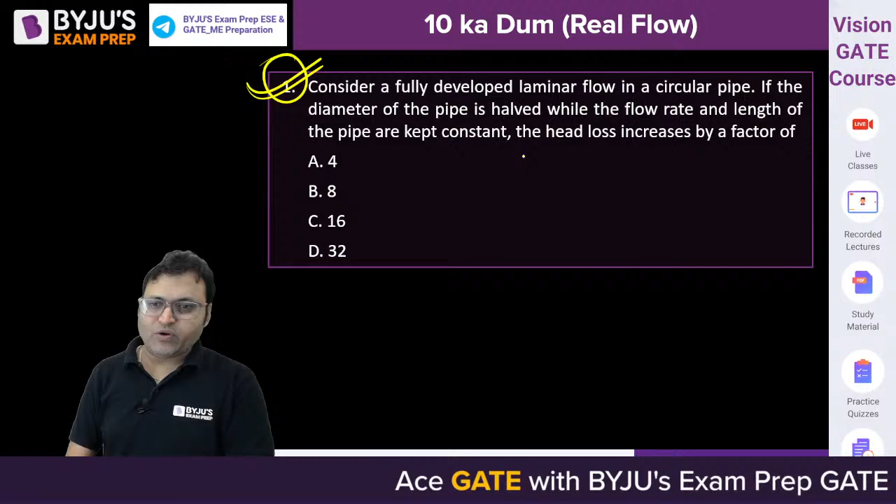Yes, do let me know the answer. Consider a fully developed laminar flow in a circular pipe, which is internal flow. When do we have laminar flow in a circular pipe? When the Reynolds number is less than 2000, it means the flow is laminar. If the diameter of the pipe is halved, it means D2 becomes D1 by 2, and the flow rate and length of the pipe remain constant—flow rate means discharge and L remain constant—the head loss will increase by a factor of, yes, waiting for your answer.

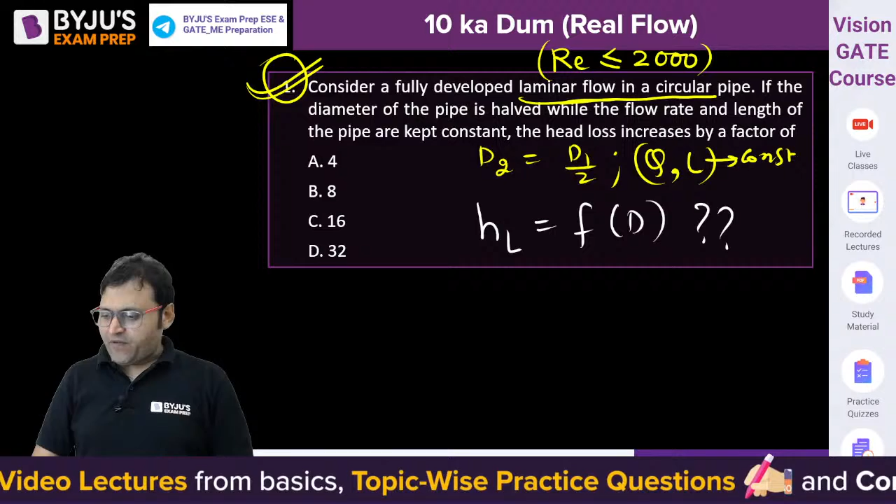From the question, it is clear that we need to develop a relation between head loss, which is due to friction, and diameter. The objective is to develop a relation between head loss and diameter, keeping the discharge and length of the pipe constant. Can you do it? Those who are here, find out the answer, develop the relationship. Once your relationship is correct, this is how the questions are framed. Nobody is going to ask you a formula-based question in the GATE examination. All questions will be conceptual, relation-based, and will require an in-depth understanding of the concept.

So we can use the Darcy-Weisbach equation, because the Darcy-Weisbach equation is the equation utilized to develop the expression for head loss due to friction. According to the Darcy-Weisbach equation, HL is given by FLQ square upon 12.1 d to the power 5.

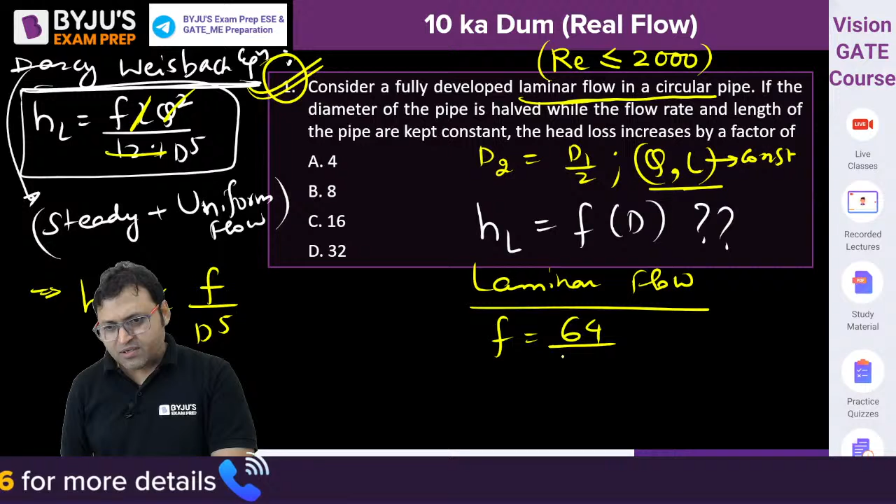And for laminar flow in the pipe, F is given by 64 by Reynolds number. What is Reynolds number? 64 mu upon rho into V into D. 64 is constant, viscosity is constant, density of the fluid is constant.

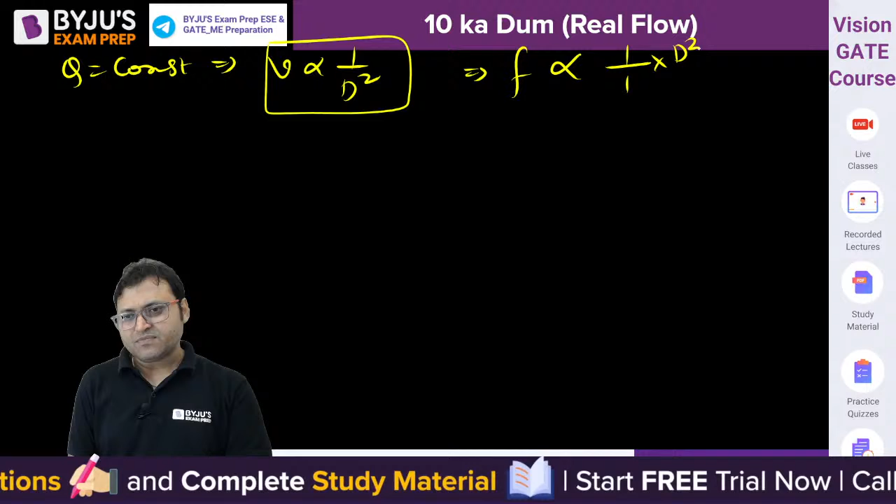So it is inversely proportional to V into D. And if Q is constant, what is Q? Pi by 4 d square into velocity. If Q is constant, then V is inversely proportional to d square. So F is proportional to 1 by V, that is 1 by d square upon d. So friction factor is directly proportional to diameter.

And if the friction factor is directly proportional to diameter, put this in equation number 1. Put the value of friction factor. So HL will be proportional to D upon D to the power 5.

So HL is inversely proportional to D to the power 4. That is the expression, that is one method. If you are able to develop the right expression, you will get the correct answer.

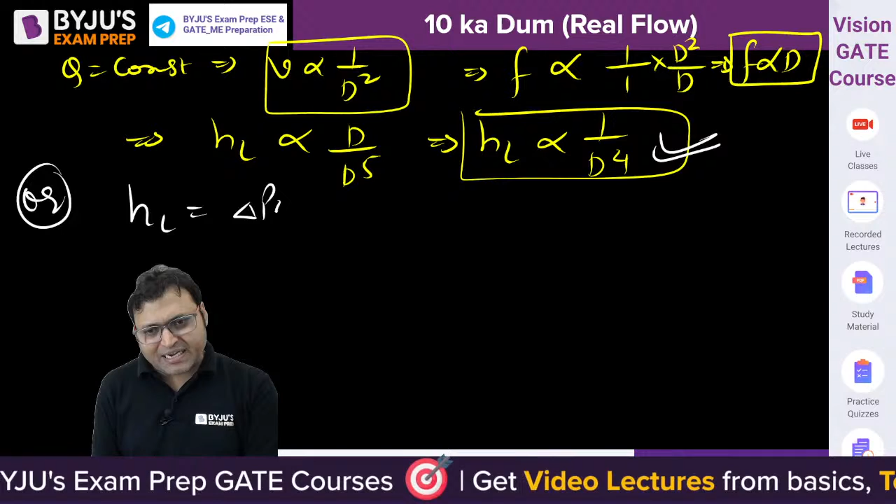Or what you could have used is HL equals delta PL by rho G. And for laminar flow, delta PL can be written using the Hagen-Poiseuille equation as 32 mu VL by D square. That is called the Hagen-Poiseuille equation, which can only be used for laminar flow through a pipe.

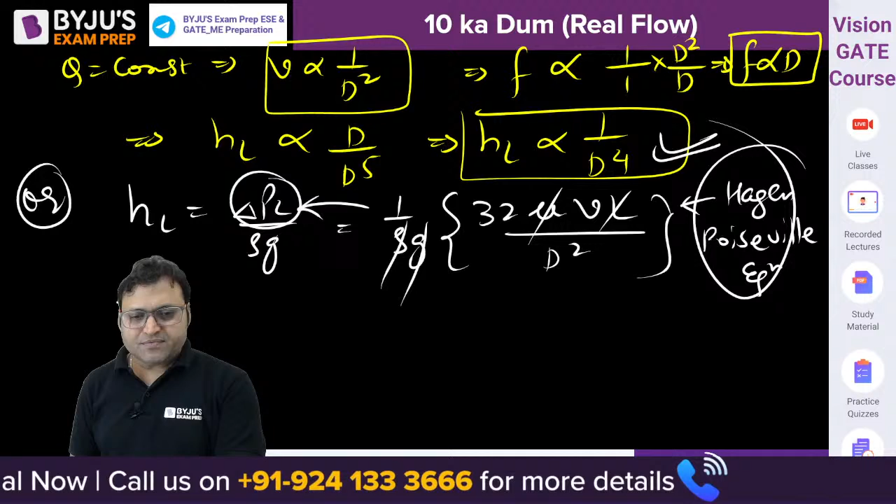So rho is constant, G is constant, mu is constant, L is given constant. So we could say HL is proportional to V upon D square, since 32 is constant. And V is equal to 4Q by pi D square. Because Q is constant, V is inversely proportional to D square.

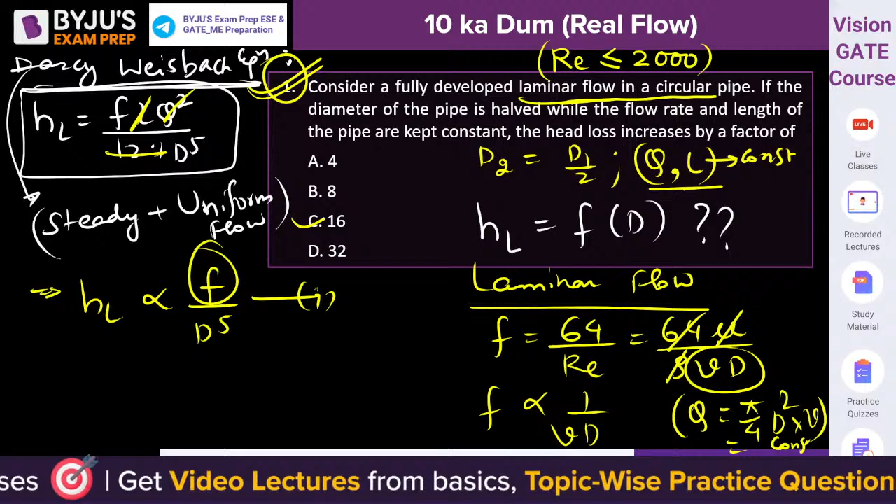If we put this in here, we get HL is inversely proportional to D to the power 4. So the correct answer will be 16. Option C is the right answer for question number 1, 16.

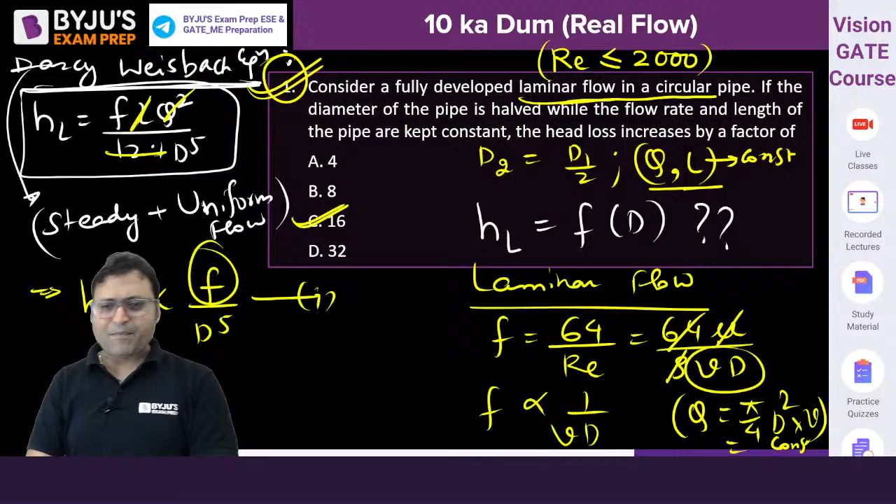Anybody having any doubt, just let me know. Either use the Hagen-Poiseuille equation or the Darcy-Weisbach equation, that is purely your choice. But if using the Darcy-Weisbach equation, you need to take care of the friction factor, which for laminar flow is 64 by Reynolds number. If using the Hagen-Poiseuille equation, it will be more simple to develop, and the relation will become the same.

Next question from dimensional and model analysis. Please give it a try. Question number 2.

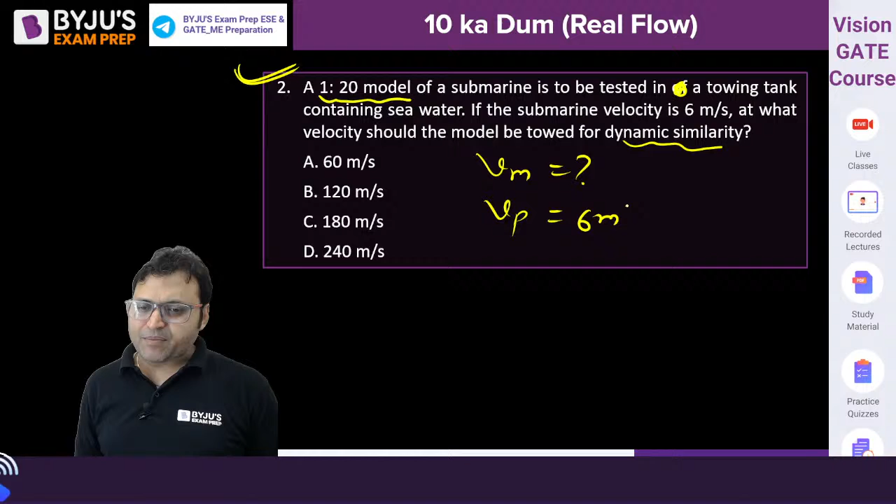Question says: a 1:20 model of a submarine is to be tested in a towing tank containing seawater. If the submarine velocity is 6 meters per second, at what velocity should the model be towed for dynamic similarity? So we need to find the velocity of the model. Velocity of the prototype is given as 6 meters per second, and LP by LM is given as 20 by 1, or LM by LP is given as 1 by 20.

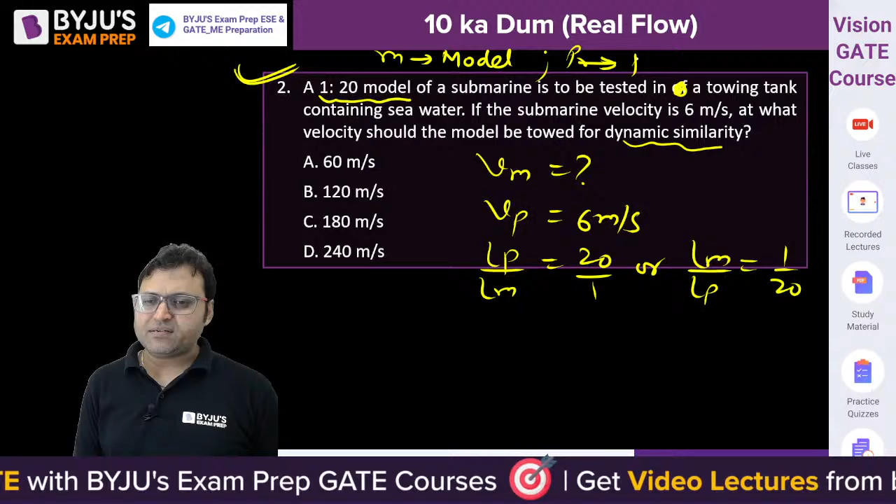Model is a small scale replica and prototype is the actual part. We use the suffix M for model and P for prototype. Now, because it is a submarine, a completely submerged body, viscous force and drag force are important. As viscous force is important in the analysis, we need to use the Reynolds model law.

We must use Reynolds model law. According to Reynolds model law, the Reynolds number of the model must be equal to the Reynolds number of the prototype. And what is the value of Reynolds number?

That remains constant. So Reynolds number, rho V L by mu, is constant. Rho is constant, mu is constant, so V into L, or V is inversely proportional to L. That is the relationship, because density and viscosity will be taken constant. The fluid is same.

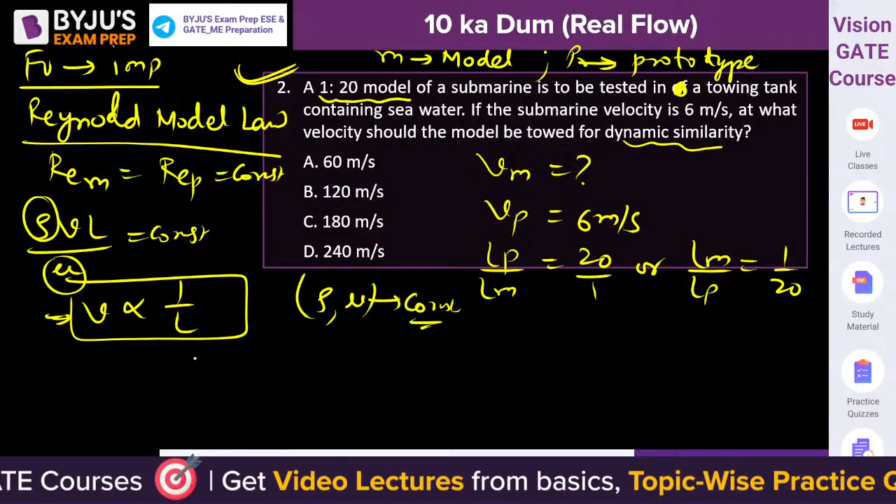So Vm by Vp is equal to Lp by Lm. What is Vm? Velocity in the model, prototype is 6 into Lp by Lm which is 20, giving 120 meter per second. So B will be the correct answer. The answer to this question is B.

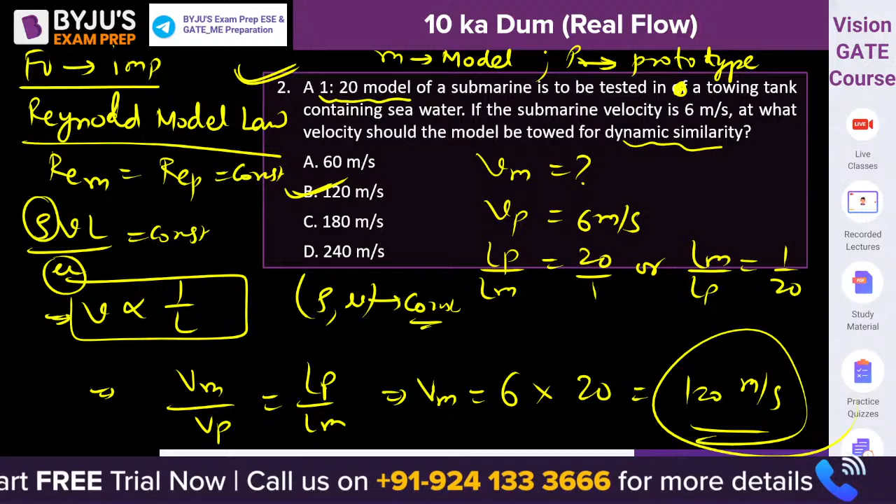Now let me see who will get me the correct answer for the next one.

Question number 3, on your screen. Can you give it a try? The question is from drag and lift, from the concept of drag and lift.

The question says an oil droplet, density of oil is 800, is rising in still water at a constant velocity of 1 millimeter per second. So the velocity, let me call it capital U, is equal to 1 mm per second. Its radius is approximately what we need to find.

It is the concept of terminal velocity, isn't it? The terminal velocity is the maximum constant velocity, or the constant velocity with which a body will be traveling in the fluid. So U is the terminal velocity.

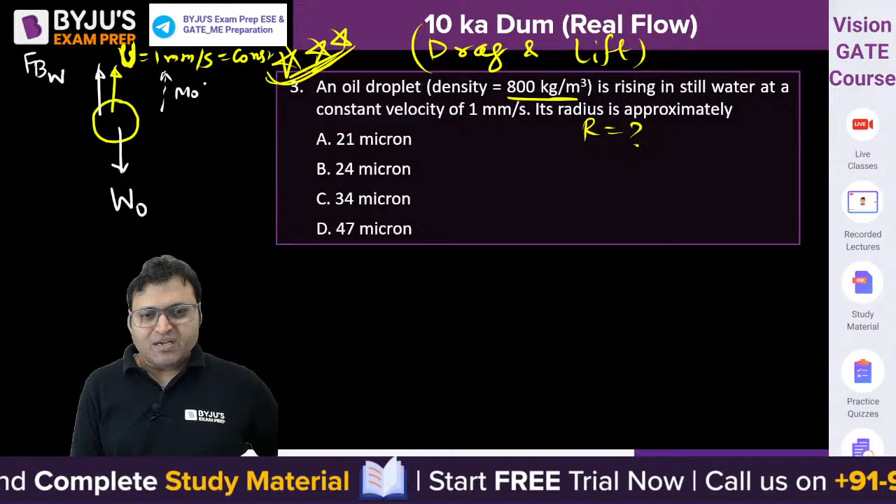What are the various forces acting on this? There is weight of the oil acting in downward direction. Then there is an upward force acting, that is buoyant force due to the immersed body. The droplet is completely immersed in water, so buoyant force by water will act in upward direction. Also, because it is moving upward, drag force will act in downward direction, opposing the motion.

So for vertical equilibrium, buoyant force by water must be equal to drag force plus weight of the oil. Sigma F is equal to 0, that is why velocity will be constant, and drag force Fd is a function of velocity.

So we can say Fb minus W, buoyant force by water minus weight, is equal to drag force. What is buoyant force by water? Density of water into G into volume of the droplet, minus density of oil into G into volume of the droplet, is equal to drag force.

Drag force can be written using Stokes law. So the drag force is 3 pi mu into velocity and diameter, using Stokes law.

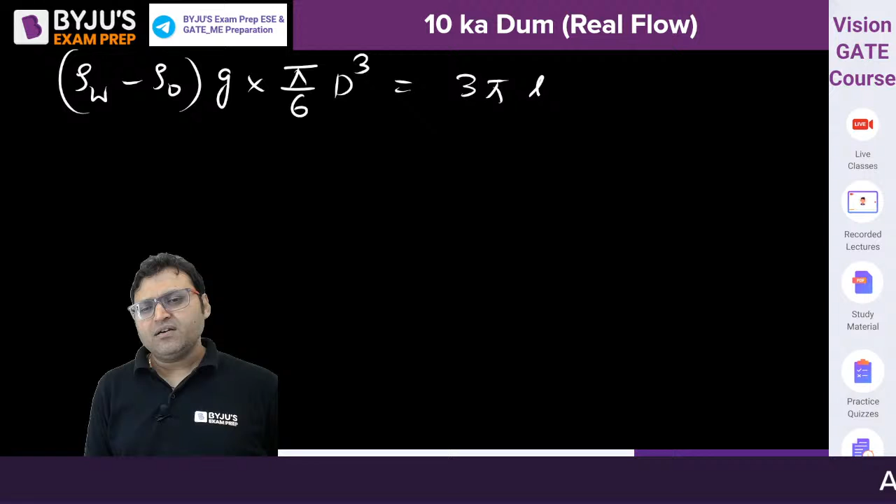So 3 pi mu of water into U into diameter. We can say rho of water minus rho of oil into G into volume of the sphere, which is pi by 6 into D cube, is equal to 3 pi mu of water into U into D. From here we can find out.

This one D will get cancelled out, it will become D square. So D square is equal to 18 pi mu of water into U. This pi and pi will also get cancelled out.

So the expression becomes 18 mu of water into U upon rho of water minus rho of oil into G, then under root. If we want D, it will be under root of this. And once we get diameter, we can find out the radius.

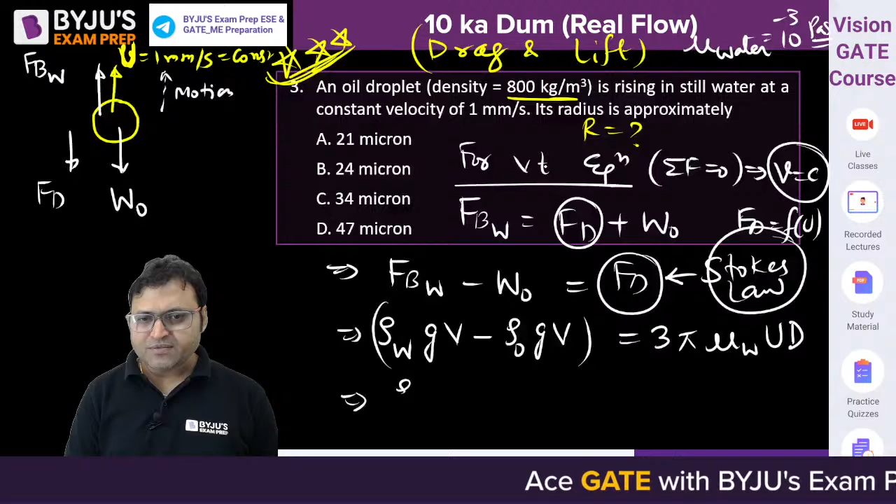So 18 mu of water is 10 to the power minus 3, U is 1 mm per second which is 10 to the power minus 3 meter per second. Density of water minus density of oil: water is 1000, oil is 800, so 200 into 9.81, or let's take it as 10. This 10 to the power minus 3 will get cancelled out. So the diameter is equal to 9 into 10 to the power minus 3 under root meter.

And what is the radius? Radius is diameter by 2. So it will be 3 into 10 to the power minus 3 meter. Can you find it out? Point 047.

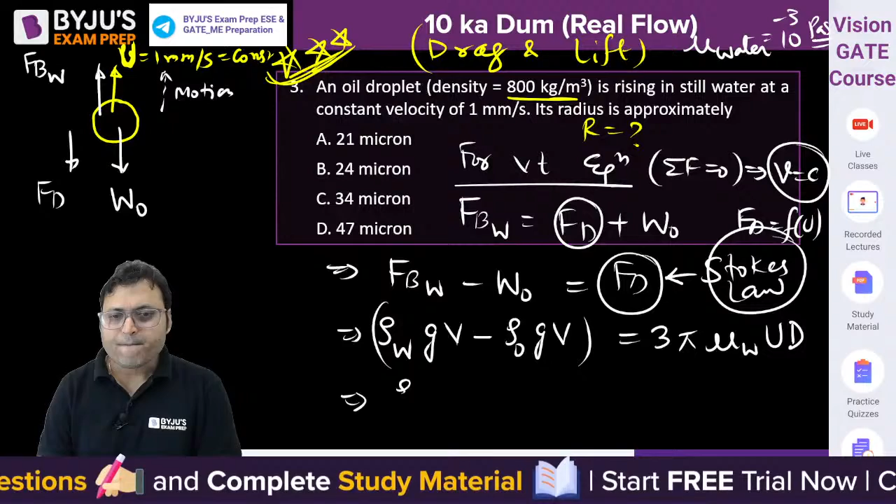How much is that? Is it 47 micron? There must be a problem with the unit. Yes, what will be the radius? 1 mm per second, so...

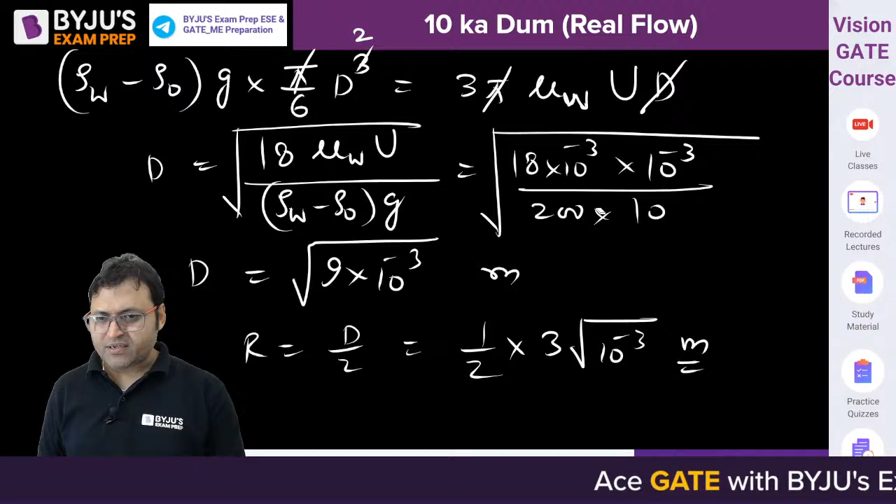Sorry, what mistake I had done is 2 into 10 to the power 3. It will not get cancelled out here. It is 10 to the power minus 3 into minus 3 into minus 3, that is 10 to the power minus 9. It will become 10 to the power minus 9.

Isn't it? So it will be 10 to the power minus 9. So this is what the answer is: 10 to the power minus 9, and under root of this into 1.5.

4.74 into 10 to the power minus 5 meter, or we can say 47.4 into 10 to the power minus 6 meter, and 1 micrometer is equal to 10 to the power minus 6 meter. So we can say 47.4 micrometer is the answer.

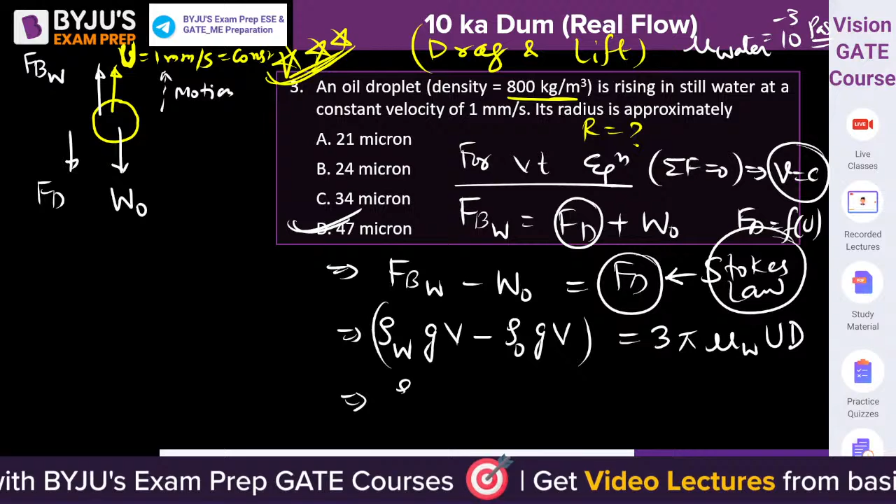D will be the correct answer, 47.4 micron will be the correct answer. Do you guys understand it? Any doubt? If anybody is having anything to ask, just let me know.

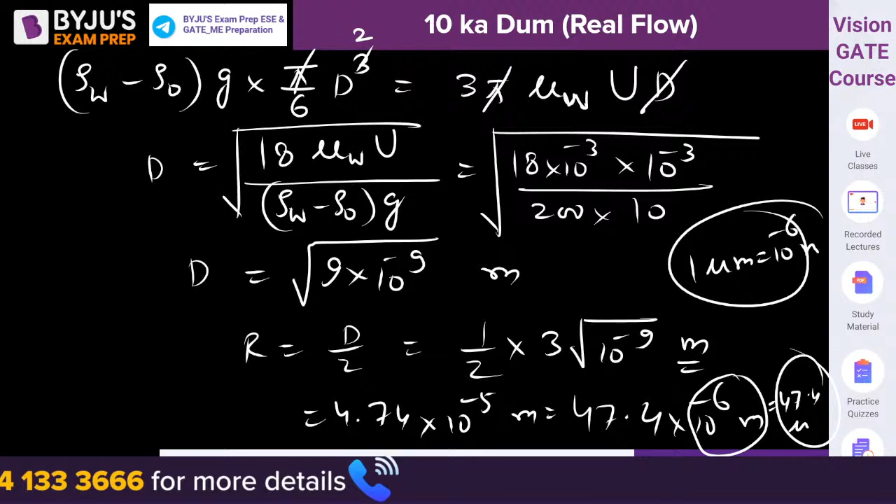Shall we move to the next question? Question number 4.

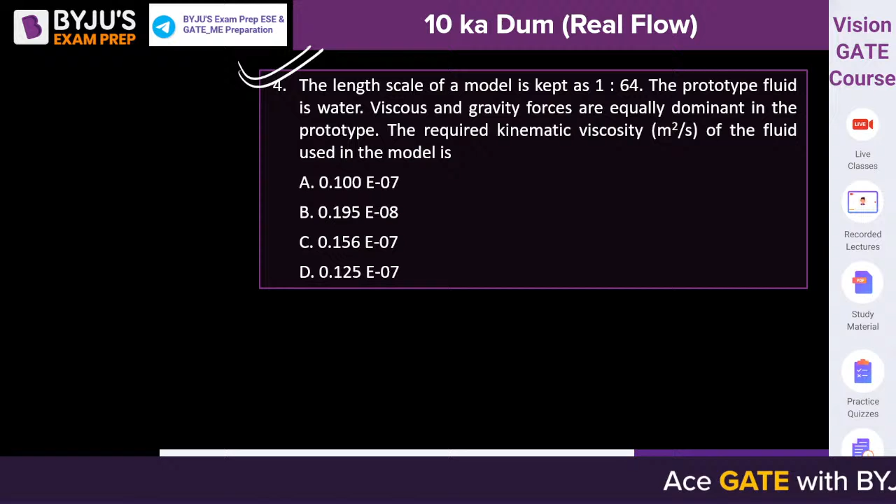Give it a try. The length scale of a model is kept as 1:64. What does that mean? Lp by Lm, prototype upon model, will be 64, or model upon prototype will be 1/64. The prototype fluid is water, and viscous and gravity both are equally dominant in the prototype.

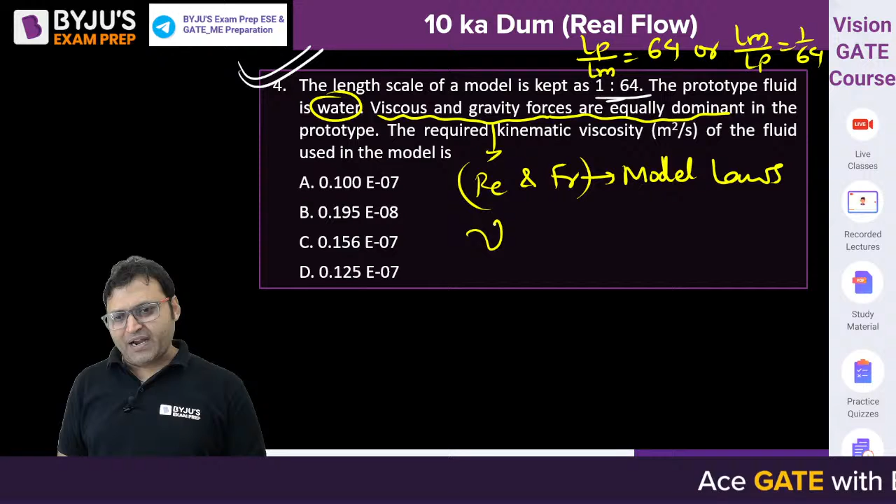When viscosity and gravity both are important, it means Reynolds model law as well as Froude model law, both the model laws will be applied. Reynolds as well as Froude model law both are applied, right? The required kinematic viscosity of the fluid used in the model is what we need to find out. Only the scale ratio is given.

So if we talk about the Reynolds model law, can you let me know the answer? Please give it a try, everyone. Use the Reynolds model law as well as the Froude model law, both. Are you guys giving it a try?

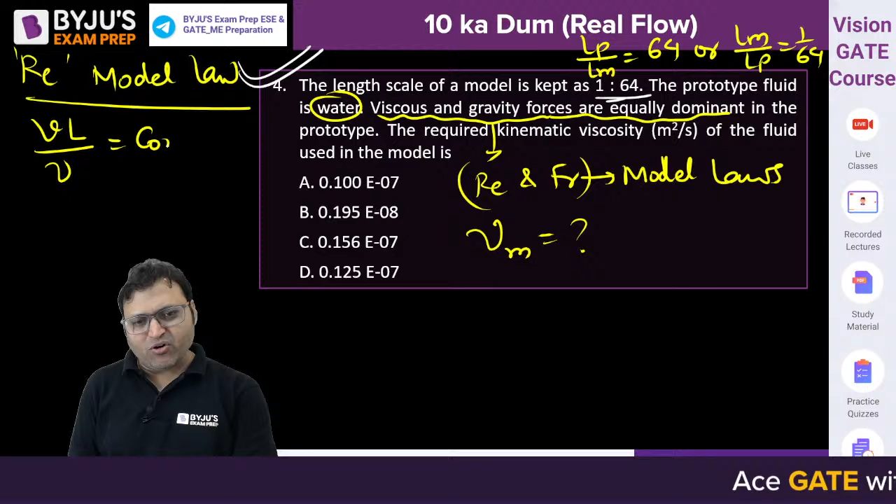According to Reynolds model law, V into L upon kinematic viscosity will be constant. So we can say kinematic viscosity is directly proportional to V into L. That is one equation. Now we do not have the velocity, we only have the scale ratio, geometric scale ratio. According to Froude model law...

If we apply the Froude model law, then what we will get? According to Froude model law, what is Froude number? V upon under root of Lg is equal to constant. So we can say here V is directly proportional to root L. Put in equation number 1, then we will get kinematic viscosity is proportional to root L into L.

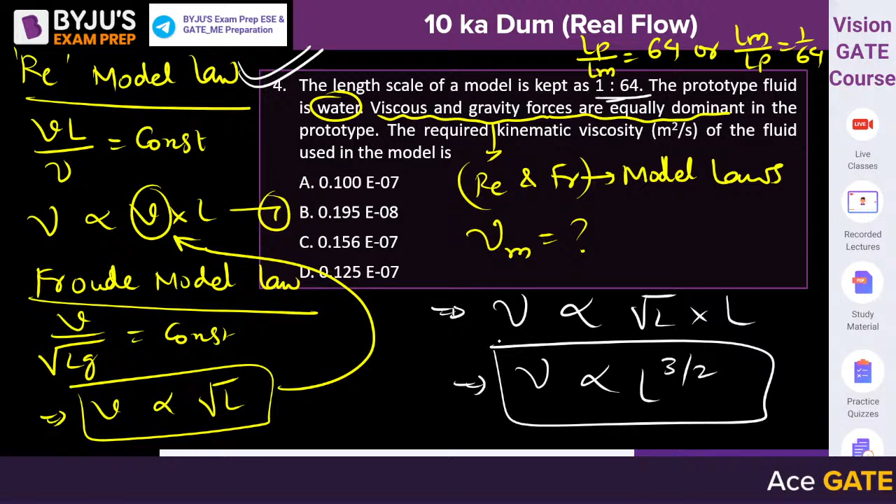And we can say kinematic viscosity is proportional to L to the power 1 plus 1 by 2, that is 3 by 2. If you are able to develop this relationship, now we can find out the kinematic viscosity in the model. So kinematic viscosity in the model upon, in equation form, upon prototype is equal to Lm by Lp to the power 3 by 2, isn't it?

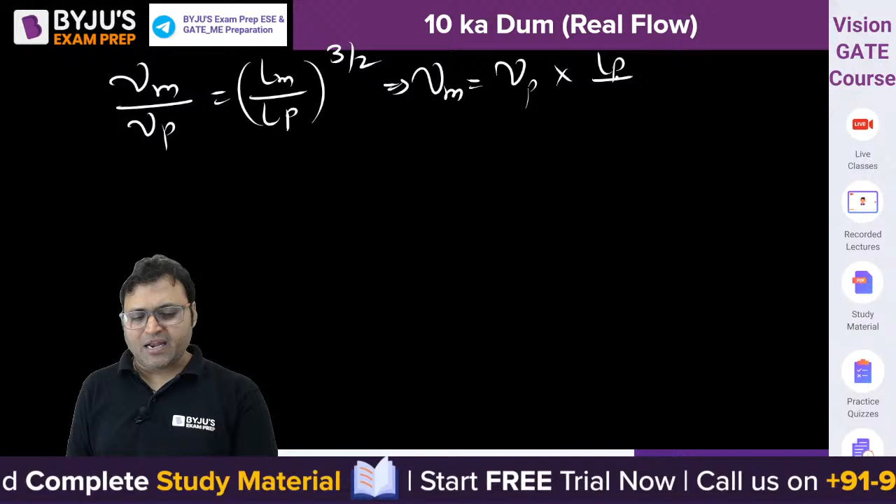L to the power 3 by 2. It will be Lm by Lp. So kinematic viscosity of model is kinematic viscosity of prototype into Lm by Lp to the power 3 by 2. Put the values.

Kinematic viscosity in the model is equal to, what is the kinematic viscosity in the prototype? It is not given, and prototype fluid is water. So dynamic viscosity, I told you, dynamic viscosity of water is equal to 10 to the power minus 3. What is kinematic viscosity of water? That is dynamic viscosity per unit density. Density of water is 10 to the power 3. So kinematic viscosity of water is equal to 10 to the power minus 6 meter square per second.

These are the important values you should have an idea of. So 10 to the power minus 6 into Lm by Lp. Lm by Lp is 1 by 64 to the power 3 by 2, that will be meter square per second. So 10 to the power minus 6, 1 by 64, under root of 64 is 8. So 1 by 8 cube. Isn't it?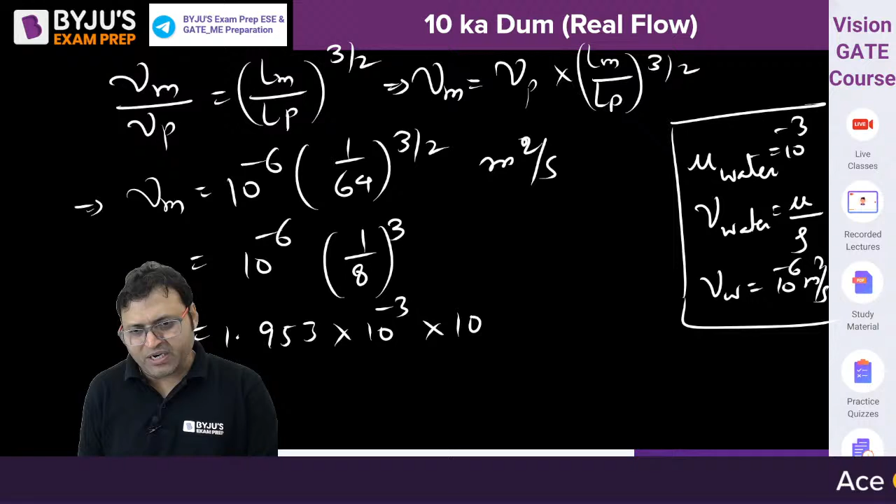So what is that? Take 1 divide by 8 and then cube of this. That gives 1.953 into 10 to the power minus 3, into 10 to the power minus 6 meter square per second. That will be the answer.

And the options are in terms of 10 to the power minus 7 or 10 to the power minus 8. The numerical value is something around 1.95, so we can write it as 0.195 into 10 to the power minus 8.

So the correct answer is, what will be the answer? B will be the right answer, isn't it? B will be the correct answer for this one: 0.195 into 10 to the power minus 8.

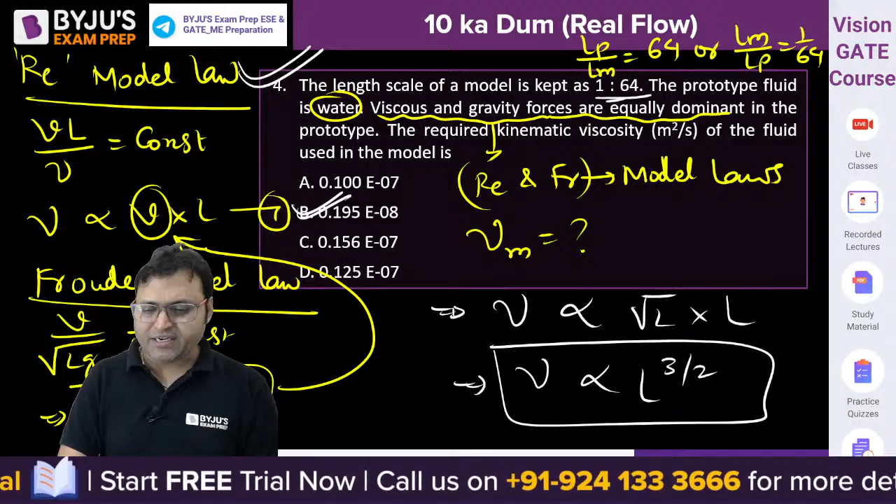Question number 5 and 6 are common data questions. Read these questions and try to solve them. Everyone, give them a try. Please solve this.

The velocity field for a two-dimensional fluid flow is given by this. This is from fluid kinematics. Beautiful question it is, that is why I had included it. It is from the kinematics of fluid flow.

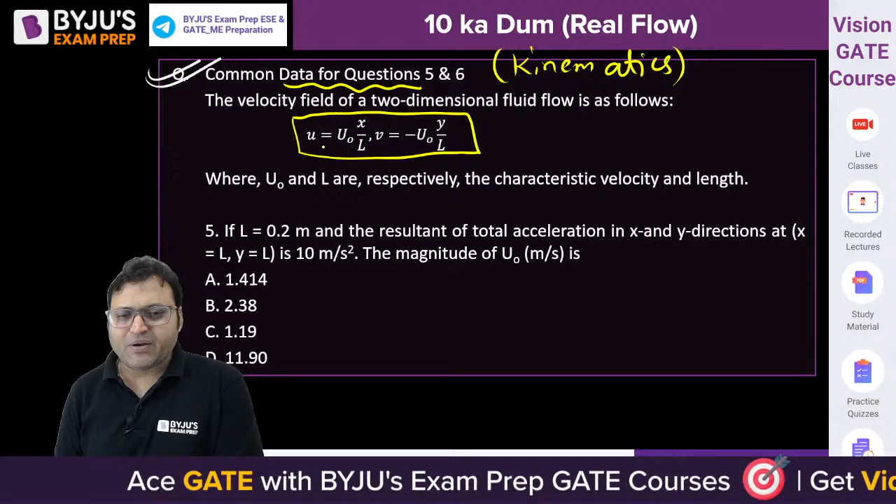The velocity field of a 2D flow is given by: velocity in x direction is u naught x by L, and velocity in y direction is minus u naught y by L, where u naught and L are respectively the characteristic velocity and the length.

Question number 5 says if L is equal to 0.2 meter and the resultant of total acceleration in x and y direction at x equal to L and y equal to L is 10 meter per second square, then what is the value of u naught? The question is to find out the value of u naught.

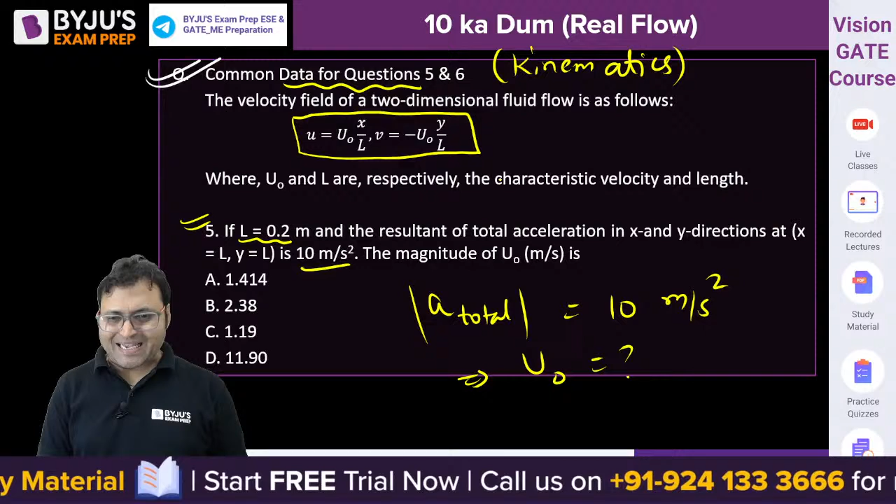You need to find out the value of u naught. So first of all, find out the total acceleration. U is given as u naught x by L, and v is given as minus u naught y by L.

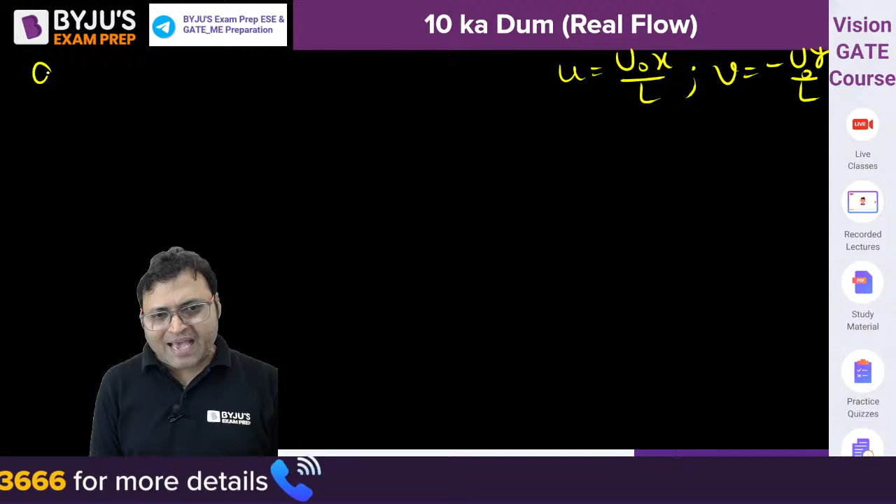So ax, acceleration in x direction, is u into del u by del x plus v into del u by del y. Because it is a steady flow, the local acceleration will be 0. Also, u is not a function of y, so that term will be 0.

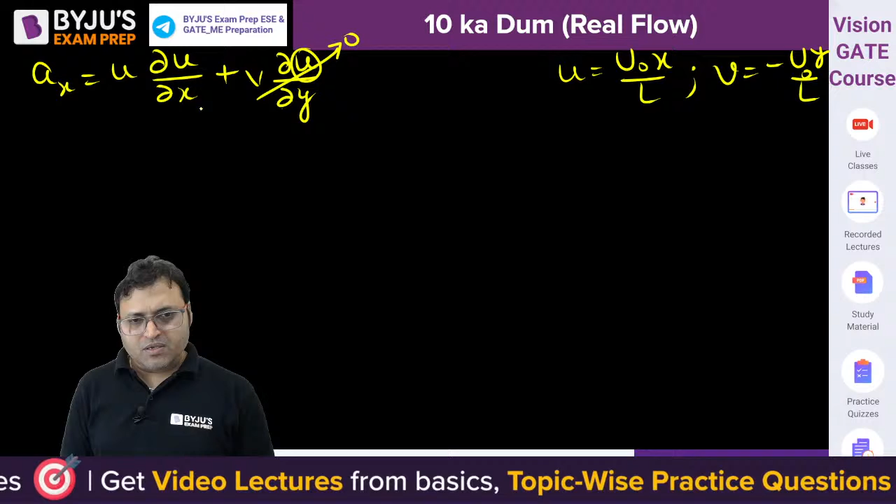So you just have to write u is u naught x by L multiplied by del u by del x, which is u naught by L. So ax will be equal to u naught square upon L square into x.

Similarly, for acceleration in y direction: it is u into del v by del x plus v into del v by del y. Since v is not a function of x, the first term will be 0. So it is v, which is minus u naught y by L, into del v by del y which is minus u naught by L. So ay will be equal to u naught square upon L square into y.

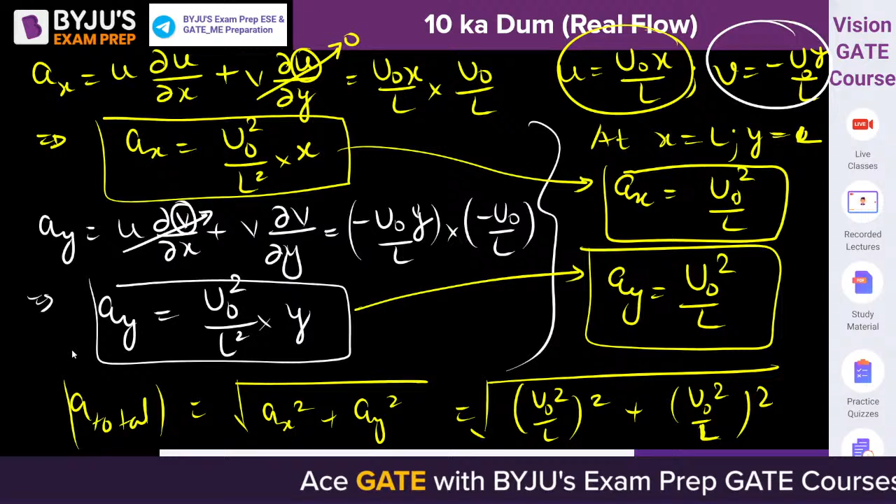So the total acceleration, which is given as 10 meter per second square, equals u naught square by L into under root of 2.

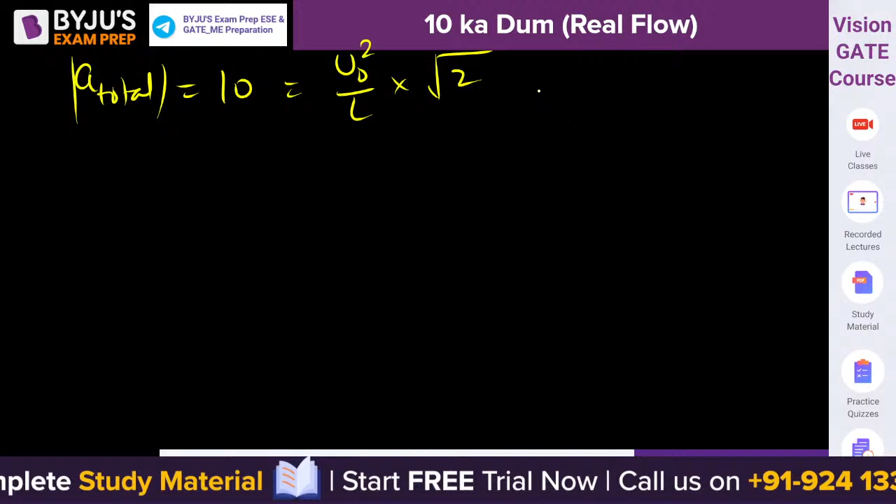For L is equal to 0.2 meter, we need to find out u naught. So put the value: 10 is equal to u naught square into root 2 upon 0.2. So it will become u naught square is equal to 10 into 0.2, that is 2 by root 2, or we can say it is root 2. So u naught is equal to root 2 to the power 1 by 2 meter per second. That will give you the answer, root 2.

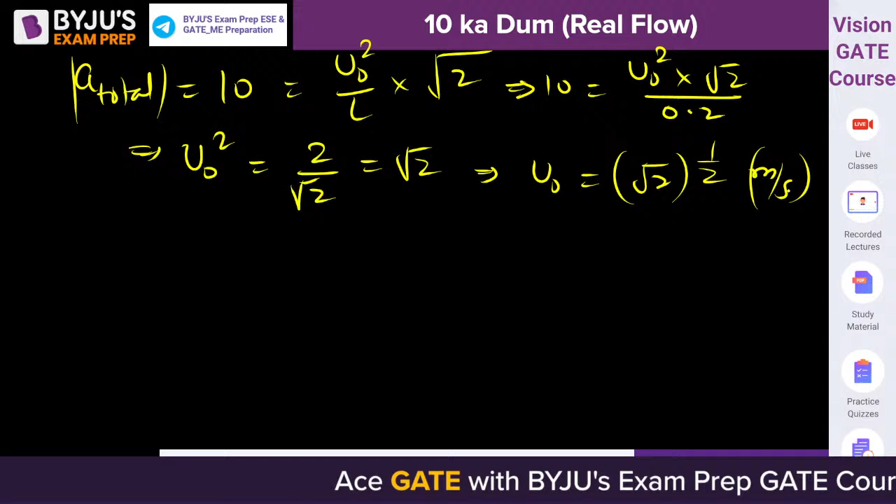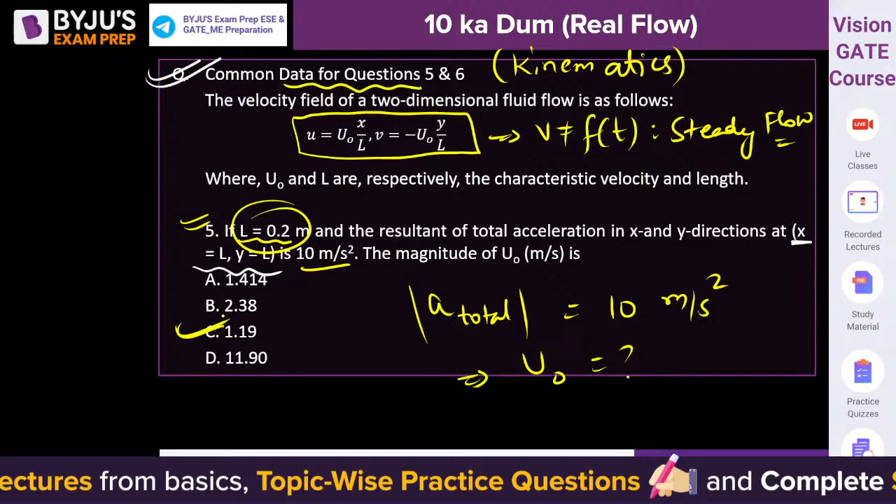Then take under root of the answer, 1.1892. So u naught is equal to 1.1892 meter per second. This will be the value of u naught. 1.189, C is the correct answer. C will be the answer for this question number 5, isn't it?

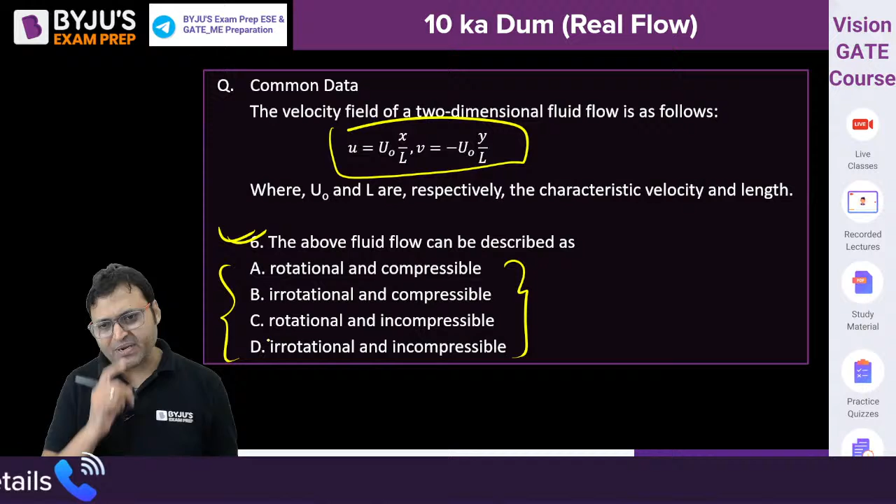Question number 6 says the velocity profiles are same. It is the common data question. The above fluid flow can be described as rotational, irrotational, or compressible and incompressible. For two-dimensional incompressible flow, if we want to check whether the flow is incompressible or compressible, what we need to have is the continuity equation.

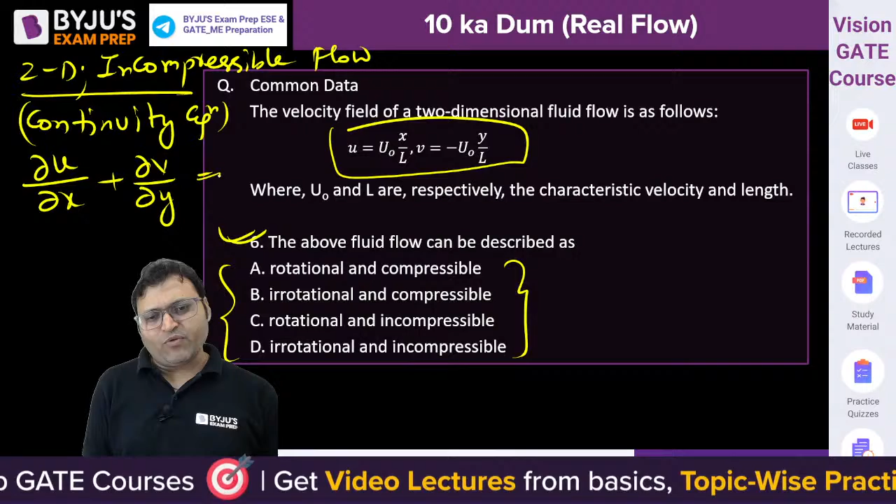For two-dimensional incompressible flow, continuity equation will be del u by del x plus del v by del y must be 0. Check LHS and RHS. If LHS is equal to RHS, first of all find out del u by del x.

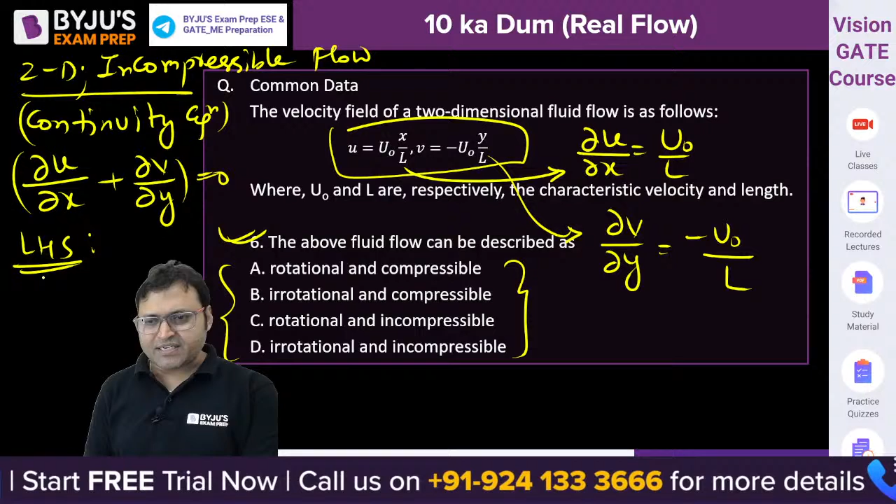What is del u by del x from here? That is u naught by L. What is del v by del y? That is equal to minus u naught by L, isn't it? So LHS is equal to del u by del x, which is u naught by L, plus del v by del y, which is minus u naught by L. So it will become 0, that is RHS. It means the flow is incompressible.

Then the flow is incompressible. So A and B will not be correct options. The flow will be incompressible. And how to check whether the flow is rotational or irrotational?

We need to check angular velocity. U is equal to u naught x by L and V is equal to minus u naught y by L. These are used to find angular velocity omega about z axis. So omega z is equal to half of del V by del x minus del u by del y. Find out the value of del V by del x.

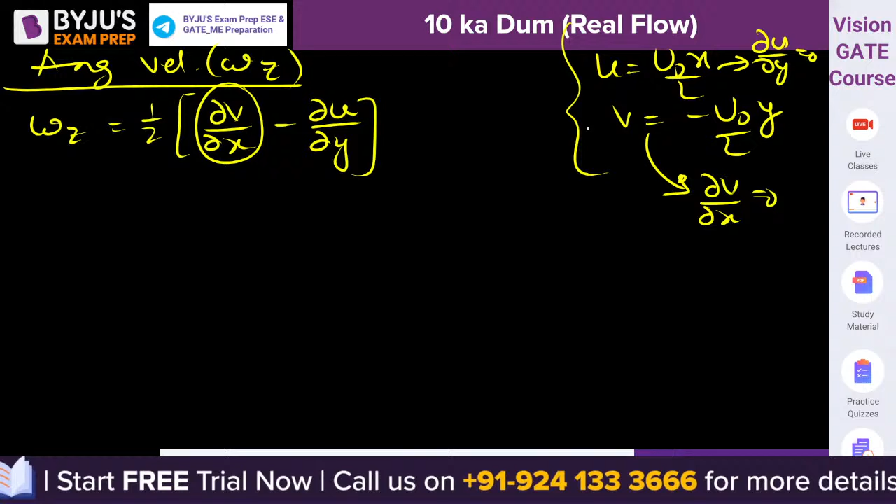That is 0, del V by del x is equal to 0. And del u by del y, that is also equal to 0, because u is not a function of y, and v is not a function of x. So it will be 0. If it is 0, then it's irrotational flow.

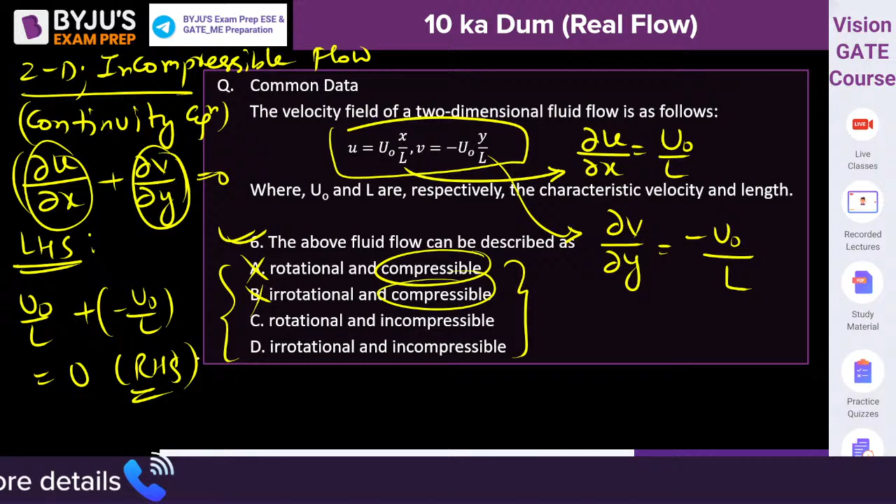The flow will be irrotational. So the flow is incompressible as well as irrotational. D will be the correct answer for this one. So sometimes the question looks a little tricky or complicated from the expressions given, but otherwise it is not that tough.

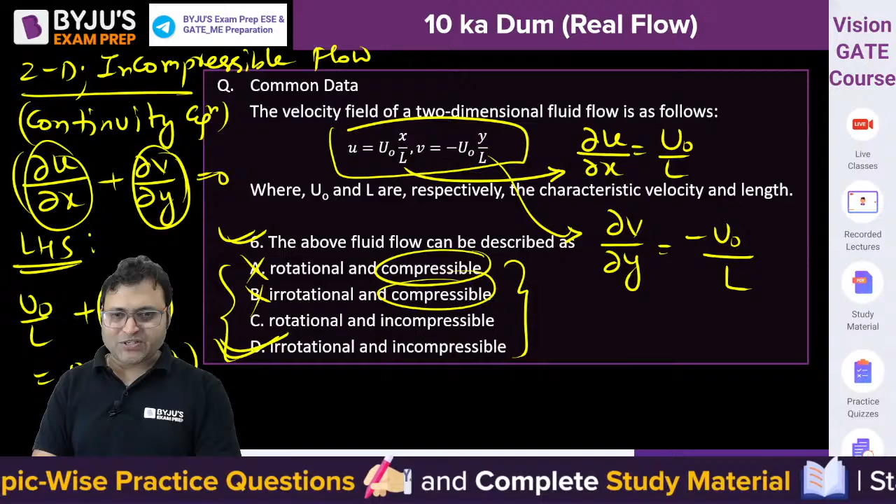We have solved 6 questions so far, and then next 4 more questions will be there.

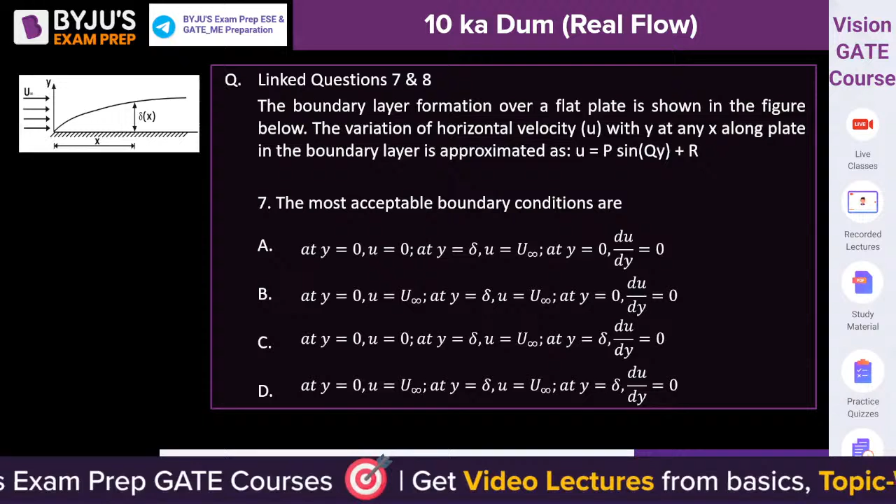All right, let us move to the next one, question number 7 and 8. Everyone, please give it a try. Read the question carefully, it's a beautiful question. Read it and give it a try. Even if you are not able to solve it in the first go, at least try to understand the question and develop the thought process of how the question will be solved.

The question is a linked question. It says the boundary layer formation over a flat plate is shown in the figure. This is the figure here, though there was no real need for it.

The variation of horizontal velocity u, velocity in the x direction, with y at any x along the plate in the boundary layer is approximated by this expression. This is the relation of the velocity profile developed in the boundary layer region.

This is our boundary layer region, isn't it? The whole region is divided into two parts: one is the boundary layer region, and the other part is outside the boundary layer region. You must know the concept of how the boundary layer gets developed.

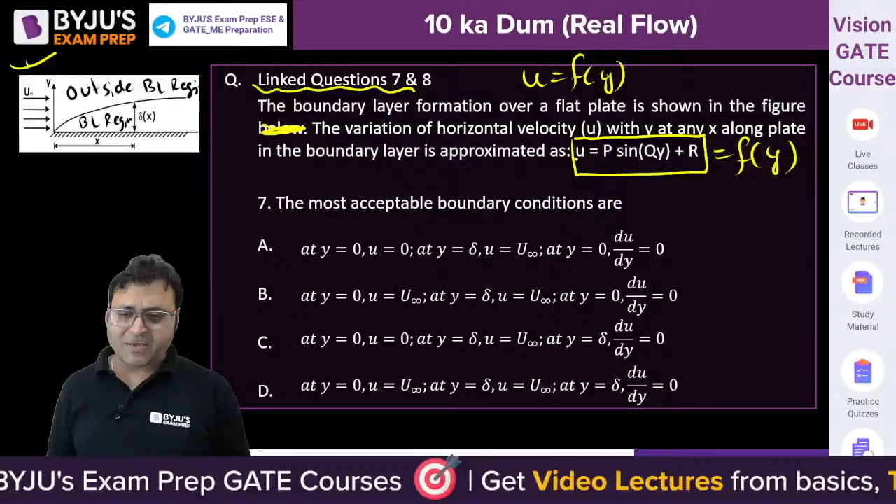Yes, it's a simple theoretical question. What are the most acceptable boundary conditions? If we draw the velocity profile at any section x, this is the section, the velocity profile will look like this.

The velocity will keep on increasing, and outside the boundary layer region, the velocity is u infinity, the free stream velocity. This is how the velocity profile develops over the plate: u as a function of y, this is y, and outside the boundary layer region, velocity becomes constant.

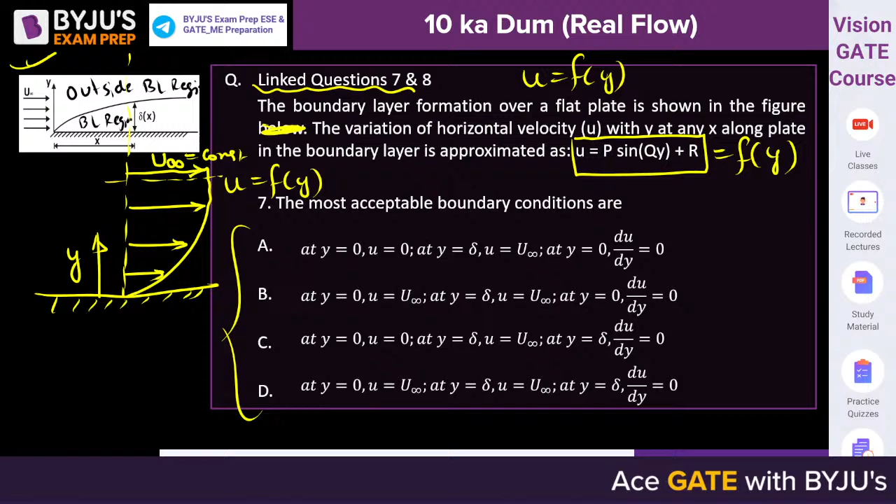So what are the conditions? At y equals 0, the velocity of the fluid is equal to 0. B and D cannot be true.

At y equals delta, where delta is the thickness of the boundary layer, the velocity becomes u infinity, the free stream velocity.

At y equals 0, can we say du by dy is maximum? And if du by dy is maximum, d square u by dy square is equal to 0. At y equals 0, du by dy is maximum, so saying du by dy is 0 at y equals 0 is incorrect.

And at y equals delta, du by dy will be 0. The fourth condition is at y equals delta, du by dy equals 0 because velocity becomes constant there.

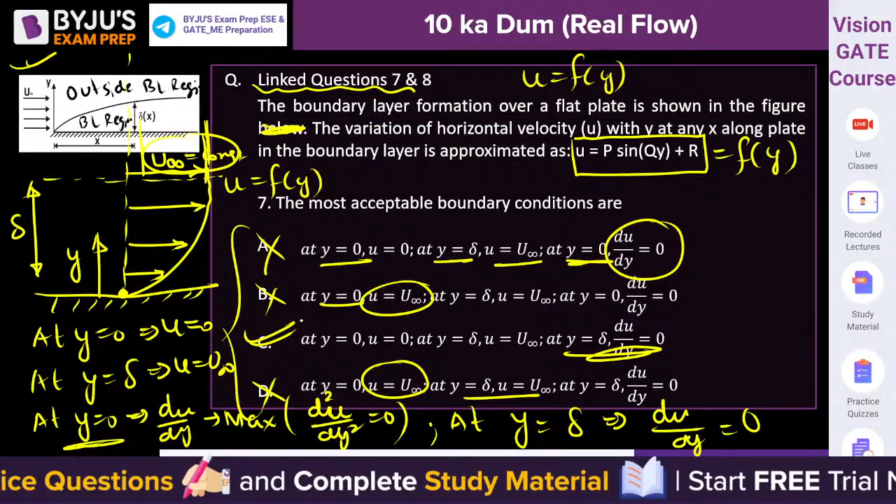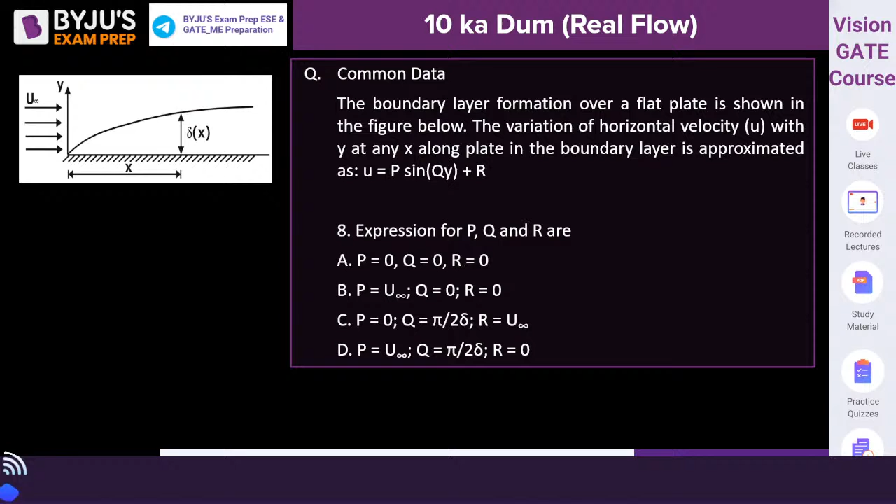The next part of the question says the expression remains the same. Now we need to find the value of P, Q and R by applying those conditions.

What are the conditions? One condition was at y equals 0, u is equal to 0. The second condition is at y equals delta, u is equal to u infinity. The third condition is at y equals delta, du by dy is equal to 0.

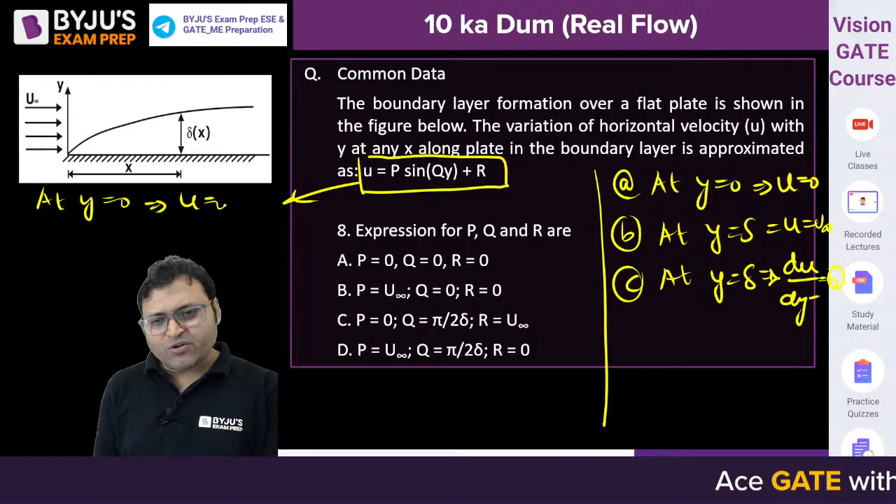Put these conditions. First, at y equals 0, u is equal to 0, so we can say 0 equals P sine 0 plus R. Sine 0 will be 0, so R will be equal to 0. Therefore C cannot be true.

Then apply the second condition: at y equals delta, u is equal to u infinity. So put it here: u infinity equals P sine of q into delta. Let this be equation number 1.

The third condition is at y equals delta, du by dy equals 0. So what is du by dy? From here we can say du by dy equals P into q cos qy, that's the third condition.

Can you solve it? At y equals delta, du by dy is 0, so 0 equals P into q into cos of q into delta.

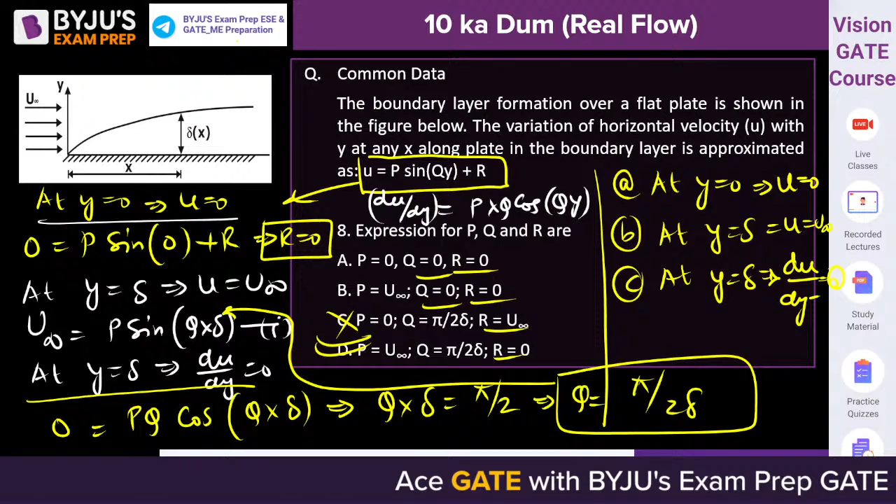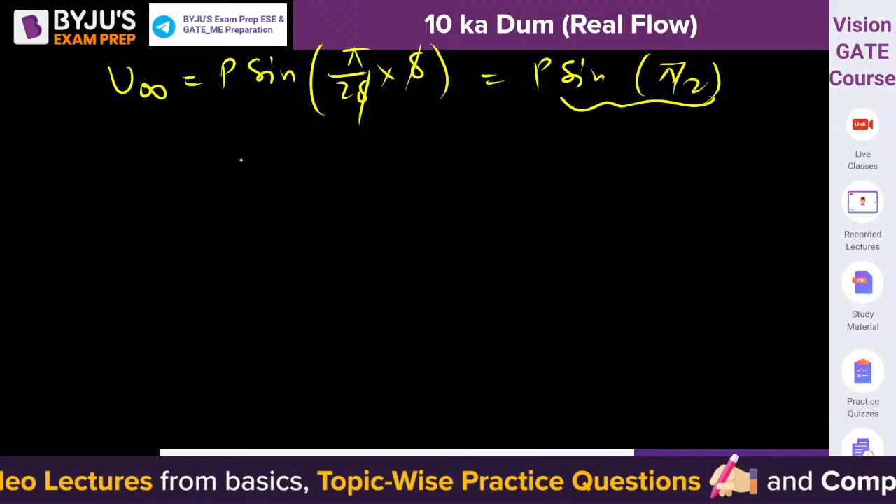If you put Q equal to pi upon 2 delta here, u infinity will be equal to P into sine(q) which is pi by 2 delta into delta. The delta gets cancelled out, so it's P sine(pi/2). And sine(pi/2) is 1, so P is equal to u infinity.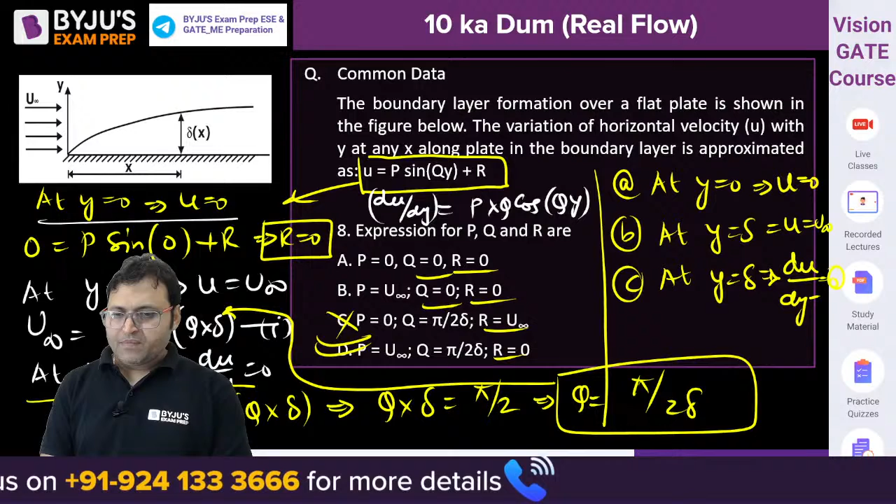So the correct answer to this question is option D. D will be the right answer, isn't it? D will be the right answer.

Question number 9, second last question for the day.

Question number 9 says: consider fully developed flow of water in a pipe of diameter 2 centimeter. The diameter is given as 2 centimeter, take care of the unit. The average velocity of the flow is 2 meter per second, that is V. The viscosity of water is 10 to the power minus 3 kg per meter second.

I have already told you it may not have been given in the question sometimes. And the density is 1000. We all know the friction factor can be calculated by F equal to 64 by Reynolds number when the flow is laminar, when Reynolds number is less than 2000. The friction factor will be calculated by 0.316 upon Re to the power 0.25 for turbulent flow when Reynolds number is greater than 4000.

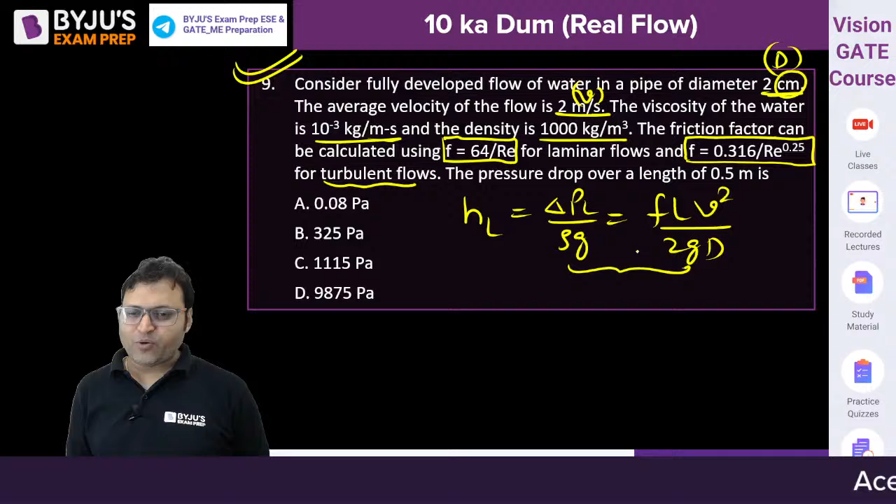The pressure drop over a length of 0.5 meter is the pressure drop. So we can say HL is equal to delta PL by rho G, which is equal to F L V square by 2GD. From here we get delta PL, with G and G cancelling out, so delta PL is equal to rho F L V square upon 2D.

The only thing left to calculate is the friction factor. Everything else is given to us. We need to find out the friction factor, and for that we need to check which value of Reynolds number will be applicable. Can you find out the Reynolds number?

Reynolds number is equal to rho V d by mu. That is equal to rho is 10 to the power 3, velocity is 2 meter per second, diameter is 2 centimeter, so that is 0.02 upon viscosity 10 to the power minus 3. So it will be 10 to the power 6 into 2 into 0.02, which is 0.04, or how much is that? It will be 40,000.

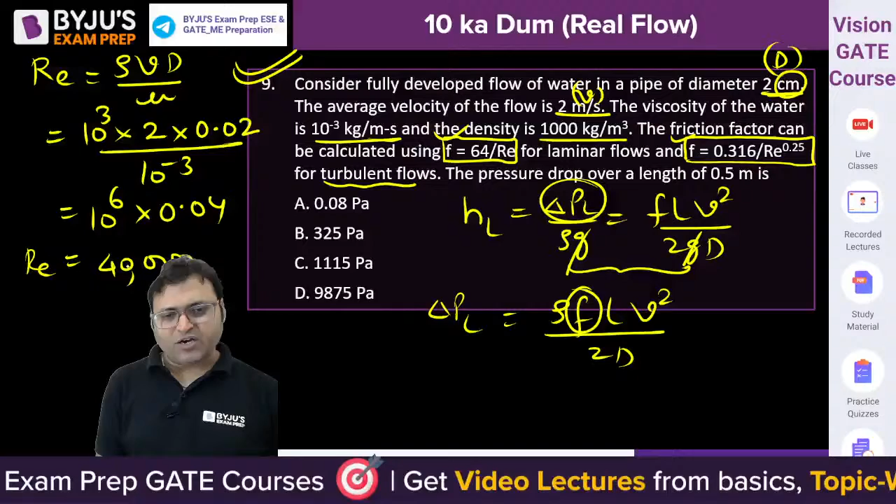Because it is 40,000, it is greater than 4,000, so the flow is turbulent. Because the flow is turbulent, we need to find the friction factor by 0.316 upon Reynolds number to the power 0.25. Friction factor is equal to 0.316 upon Reynolds number to the power 0.25, so 0.316 upon 40,000 to the power 0.25. That will give you the friction factor.

It is 0.0223. That will be the value. Put this in equation number 1. This is equation number 1, put the value in equation number 1.

So delta PL, which is equal to rho F L V square upon 2D, isn't it? Rho F L V square by 2D. Rho is 10 to the power 3. The options are in Pascal only. 10 to the power 3, friction factor 0.0223 into length, which is the pressure drop over a length of 0.5 meter. This is L, 0.5 into V square, 2 square upon 2D. Diameter is 0.02.

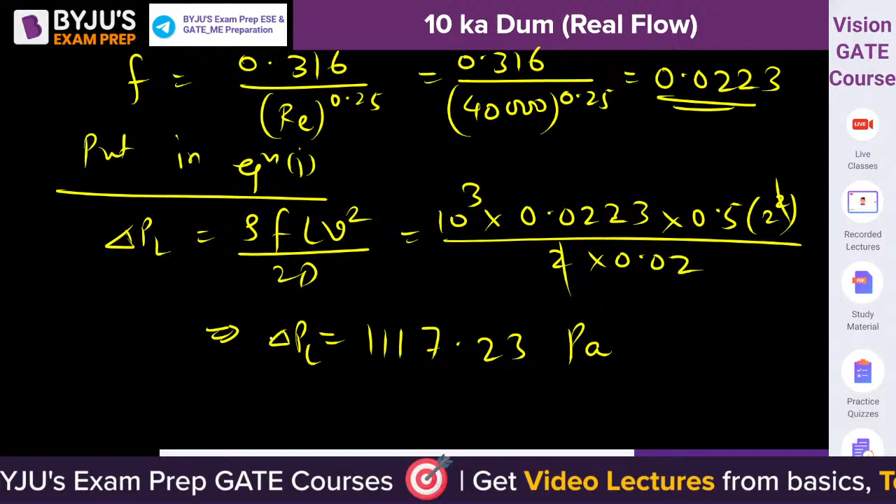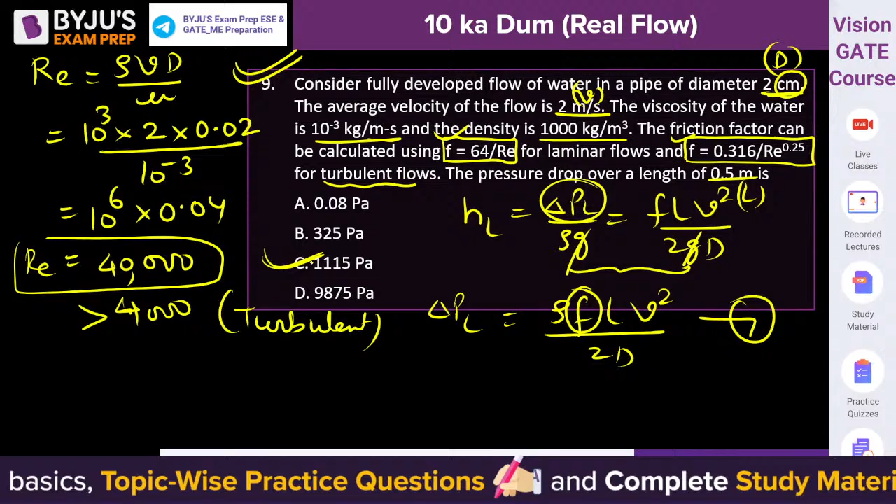So this 2 is getting cancelled out with this 2. Can you solve it? 2000 into 0.5 into 2, divide by 0.02. That gives 1117.23. Delta PL will be equal to 1117.23 Pascal. So the nearest option is option C. Option C will be considered correct.

I hope this is clear. Can we proceed further?

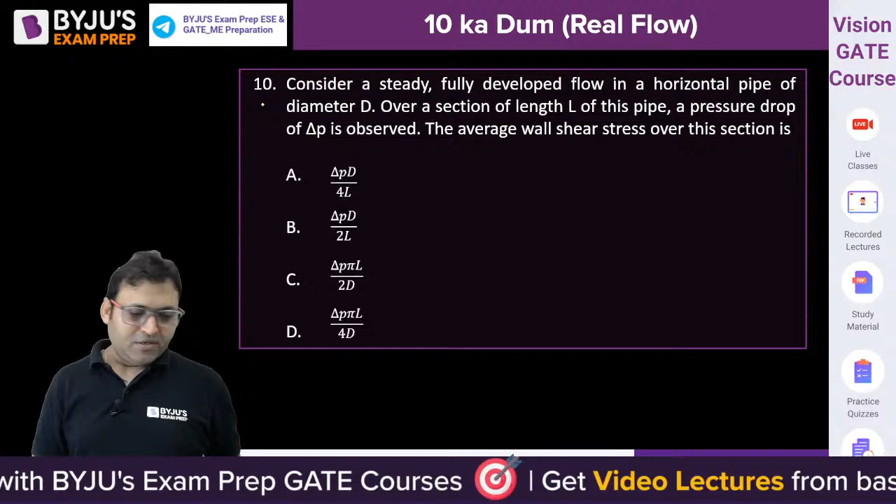Question number 10, that is the last question for the day. Consider a steady, fully developed flow in a horizontal pipe of diameter D. Over a section of length L of this pipe, a pressure drop of delta P is observed. The average wall shear stress over this section is to be found. Whether the flow is laminar or turbulent is not given or mentioned.

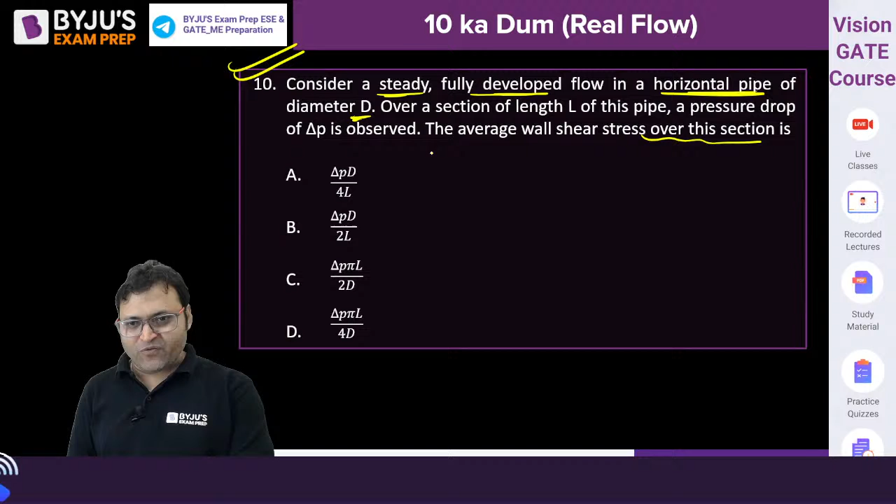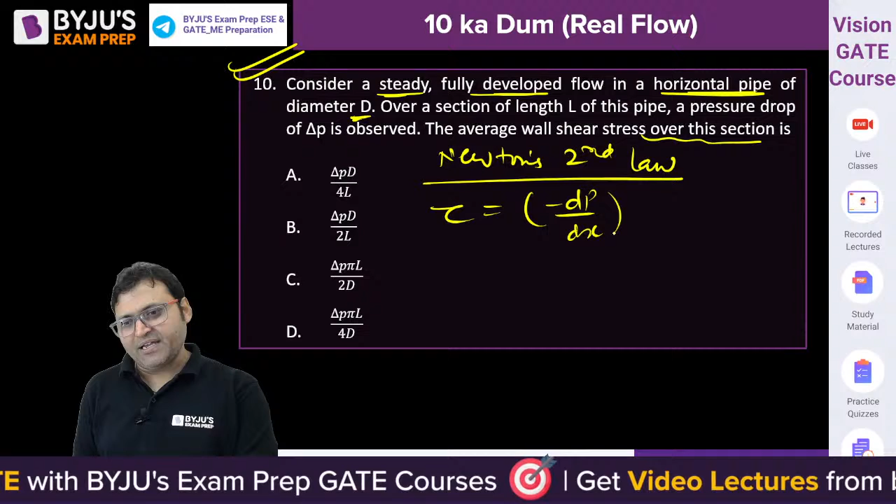There is a formula, if you are aware, from Newton's equation of motion or momentum equation, Newton's second law. From Newton's second law we develop a relation: tau is equal to minus dp by dx into r by 2. This is valid for laminar as well as turbulent flow in a pipe.

But the question is to find the wall shear stress. So at R equal to capital R, that is D by 2, tau becomes maximum, that is tau naught, called the wall shear stress or maximum shear stress. Put the value R equal to D by 2, so tau naught will be equal to minus dp by dx into R equal to D by 2, so it will be D by 4.

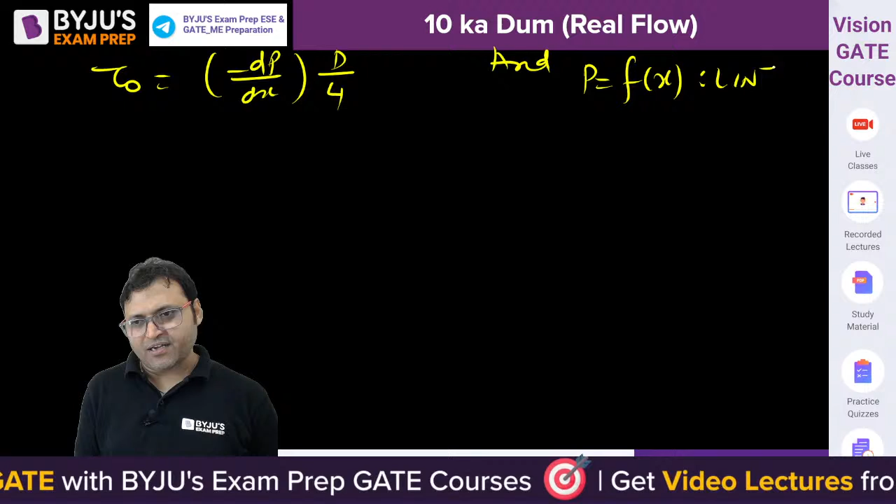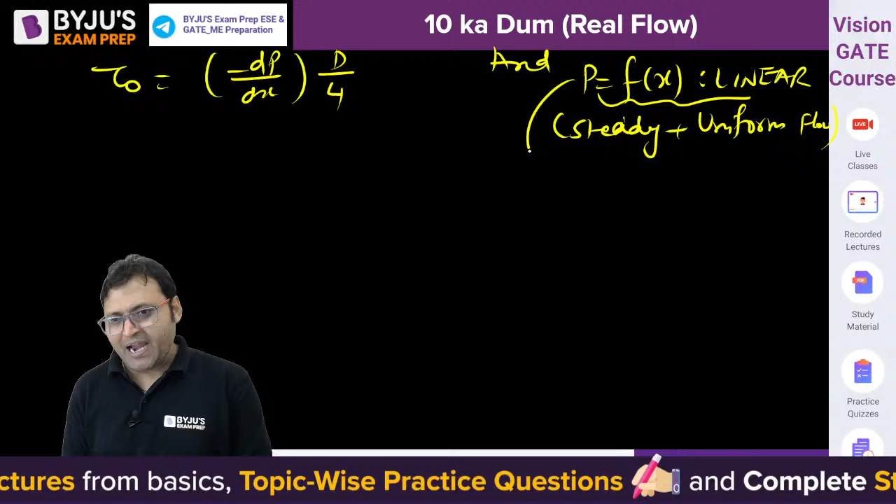P is a function of X that is linear. Pressure varies linearly in steady and uniform flow in a pipe. And if the variation of pressure is linear, minus dp by dx can be written as delta P by L because of the linear nature. So our expression is tau naught is equal to delta P by L into D by 4.

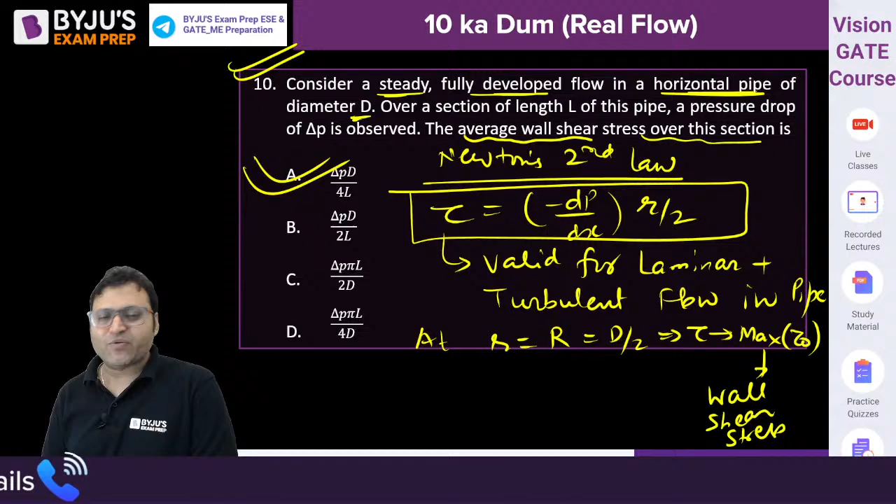This will give you the answer, the wall shear stress: delta P into D upon 4L. A will be the correct answer. Yes Pradeep, well done. This expression is valid for laminar flow as well as turbulent flow in the pipe.